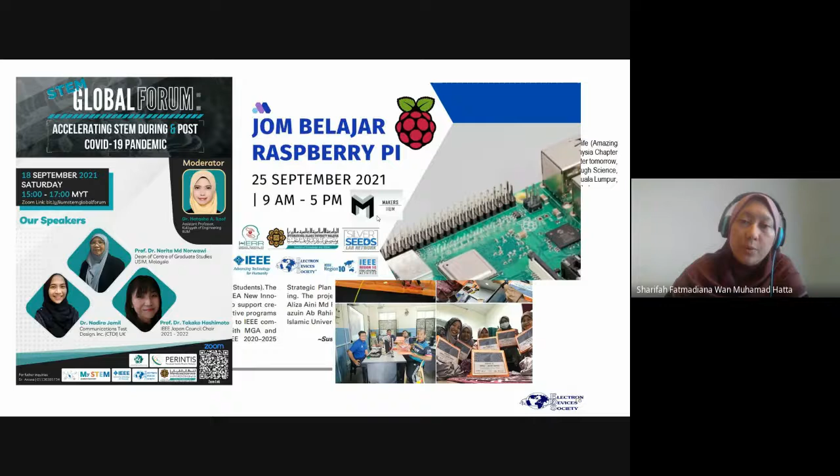So these are pictures again taken before COVID. We are quite recognized by other IEEE chapters. We were awarded the Outstanding Chapter in 2018 and 2017, and these are some of our awards.

We also co-organized some conferences, only last 2 years back in 2020 and 2021 we did a virtual conference. Hopefully in 2022 we can do a hybrid conference in Langkawi, that's ICSE. So I hope everyone can send some of your current work to our upcoming conference.

We also acknowledge women in engineering. This was done in March earlier this year, we did a forum to talk about women in engineering.

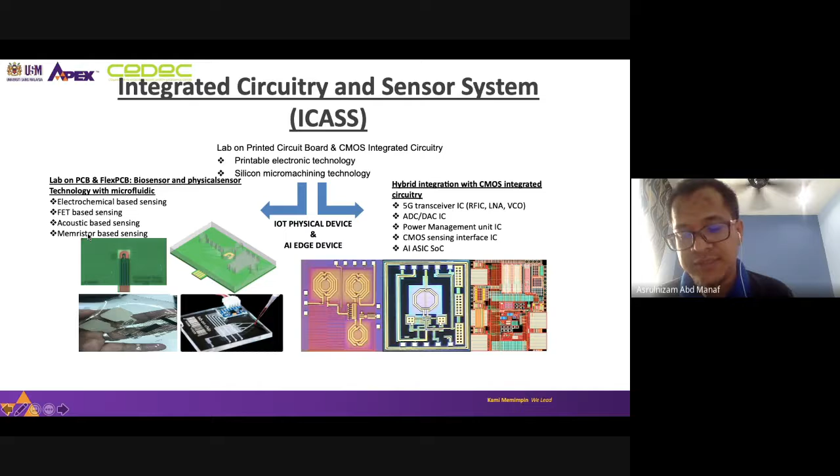So this is what I want to touch today: printable, stretchable electronic devices, specifically for medical applications. This is the outline for today.

I will explain the motivation for how we focus on the lab on printed circuit board. Some term it lab on flexible printed circuit board, the FPCB - lab on flexible printed circuit board.

Today I just give some idea of how our group focuses on developing a few sensors - pH sensors using electrochemical sensing with printable electronics, how we develop the pH sensors, and also the strain sensors, with specific application for wound monitoring.

And then I will give you some idea of how we explore the substrate selection, how we do the selection criteria into the printing technique.

There are a lot of printing techniques available in current technology - we have inkjet-based, we have screen-printed based, and a lot of other types, but they have criteria that you have to match with your application and your ink condition.

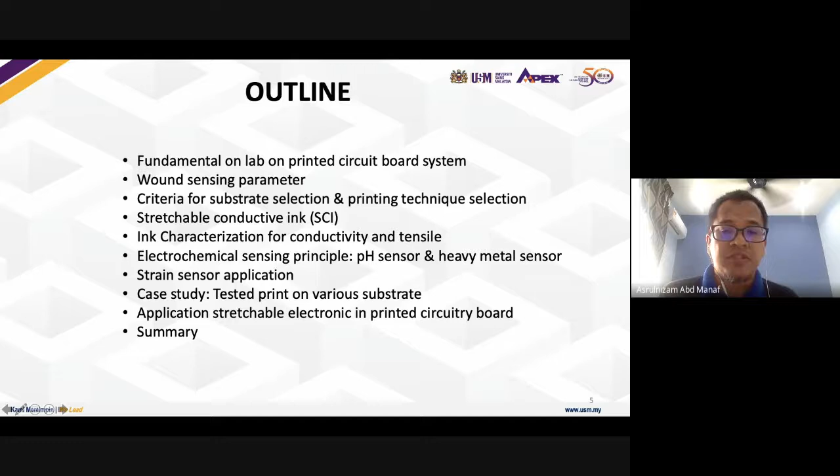Okay, I think Prof. Nohayati and all of you are already familiar with what they call the lab on chip - meaning how they work towards diagnosis, towards simplifying the diagnosis system.

In 1980, when MEMS technology - the microelectromechanical systems technology - was explored, a lot of sensors came out, like small pressure sensors and micro valves. This type of advancement in semiconductor fabrication led to the lab on chip.

That means they have technologies to miniaturize the functions of the lab onto one substrate. But in our group, because we try to make it affordable technology, I mean what is the simple technology?

Because if you rely on lab on chip, you need a lot of complex fabrication tools, such as sputtering, evaporation, and of course you have to have good lithography - that's based on miniaturization, for pattern fabrication.

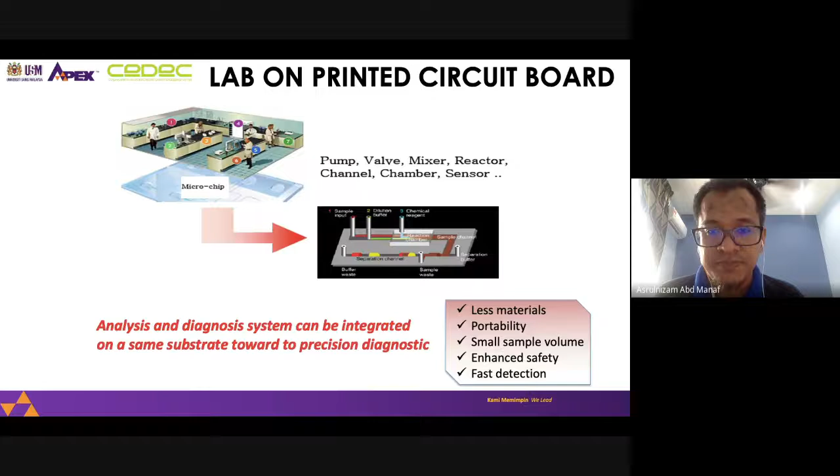Towards that technology, what we focus on in my group recently is the smart bandage. How can we develop a smart bandage system? So what is the problem with the current smart bandage? The current wound management.

When you have an injury or a wound, for example diabetes patients after surgery, they have a wound. The doctor has to monitor the wound condition, clean the wound, and so on. But with the current bandage, when it's attached on your wound, the doctor cannot get...

objective data in real time. So normally the doctor will advise you to come back next week to the hospital, and they will open it up to see if they need to do cleaning again, some antibiotic treatment, and then paste a new bandage again. Based on literature review, the doctor will replace a new bandage.

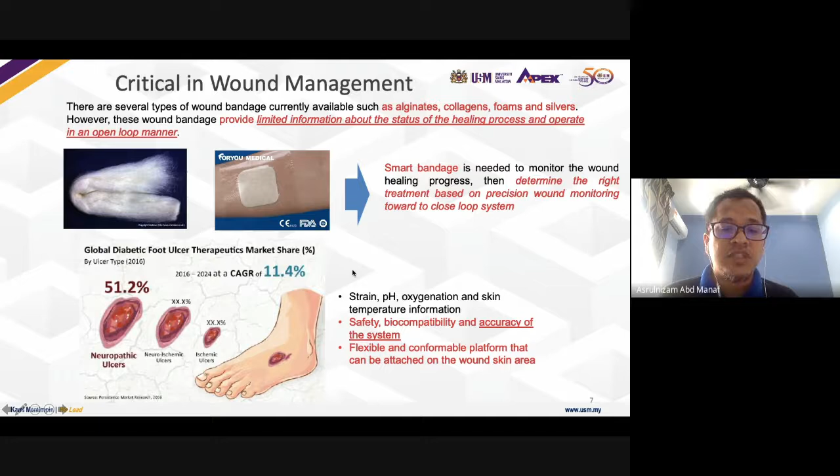We did some literature review in our group and found a good paper from the Matthew S. Brown group, published in Frontiers in Bioengineering and Biotechnology. From that paper we found a few parameters to consider for wound condition: the pH at the wound area, the oxygen level at the wound, the temperature, and also a strain analysis of the tissue.

From that data, it may be possible using printable technology to develop pH sensors so we can know the condition of the wound. This is a normal scale, the pH range from their study.

If the wound pH is more alkaline, it's easier for bacteria to grow, so we need to reduce it back to a healthy pH by giving the proper amount or dose of antibiotic. From that paper, some systems can give the right amount of antibiotic, meaning the treatment works toward what we call precision medicine.

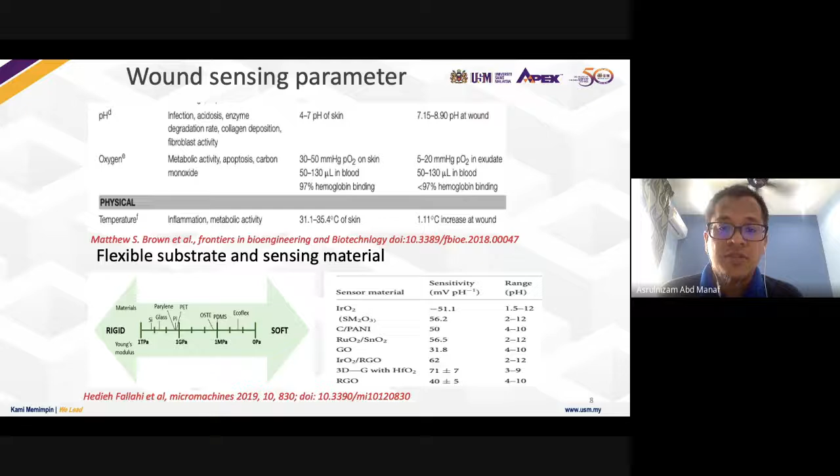From that, now we come to how to do the selection of materials, meaning the substrate itself.

We try to make it okay, hopefully one day attached to the skin, and how to make it avoid inconvenience to the patients.

So we went through a paper from Rogers et al., who we consider the founder of the Printable Electronics group. They did a good study in terms of conformal conditions - there's some substrate thickness involved. If you see these diagrams, you can find the details in that paper, published in Science in 2011. That's about the thickness.

If your substrate thickness is 500 micrometers, you can see they still have a gap. The analogy is that 500 micrometers is similar to our silicon wafer thickness - the current silicon wafer thickness is about 400 to 700 micrometers, that's roughly the thickness of a wafer, meaning compared to the skin.

In the image of the skin structures, you can see it still has a gap - it's not really achieving good attachment on the skin. So this group studied 100 micrometers, and you can see improvement, but still have a gap. They cannot follow the conformal structure of the body skin. Then they went to 36 micrometers, and they showed improvement, but after reducing to 5 micrometer thickness, they achieved very good conformal contact on the skin structures.

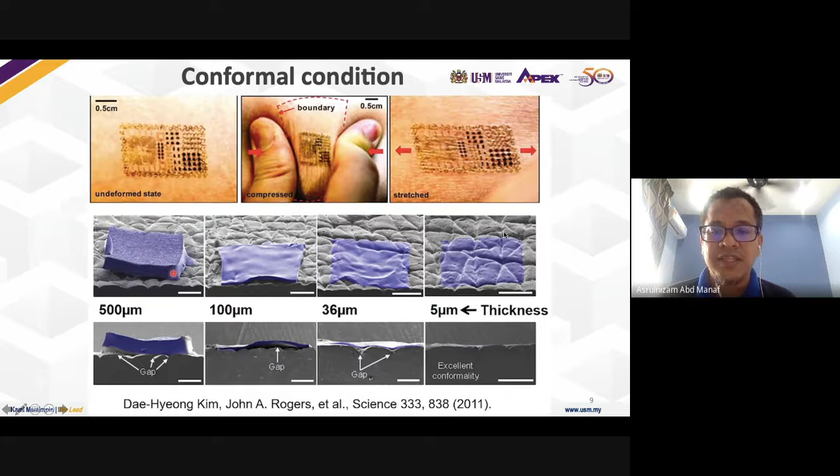What's the other issue studied by Prof. Someya, from the Someya group at Tokyo University? They are considered good founders and researchers in printable electronics. They used silicon rubber, and parylene at 1 micrometer. Their group has nanomesh conductors - this is a gold electrode, and they evaporate that electrode onto polyvinyl alcohol.

The polyvinyl alcohol is considered a water soluble material. So they printed the pattern of gold electrode on the PVA, and then used water so the PVA is removed. When the PVA is removed, the pattern can straight away be attached onto your skin.

What they studied there - with other techniques, there's an issue on the skin effect. This area is fully attached, meaning there's no air gap for the skin to breathe. That's what they mentioned in that paper.

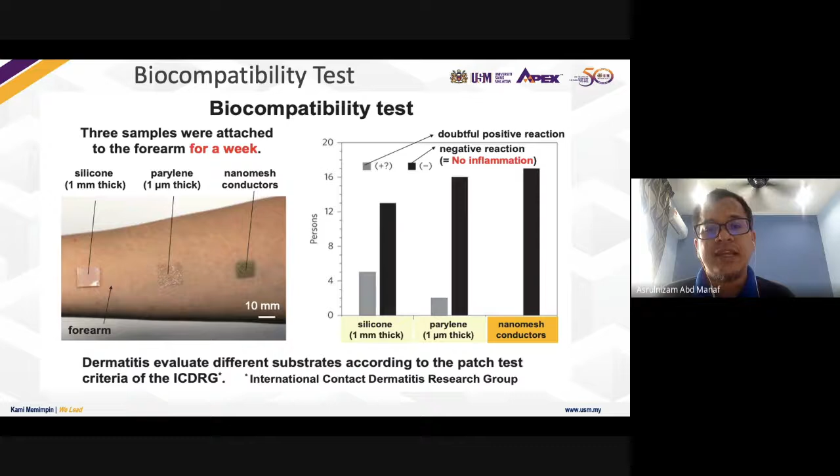By doing the design specification and sensing parameters, we also have to consider the substrate thickness, based on the application and how we can do the printing - to make our substrate flexible and stretchable.

This is a study done by very top research groups, from Illinois, Tokyo University, and Someya's group - evaluations of transistors and printable electronic stretchable devices. If you go through it, there are three types, three methods to make our substrate into flexible devices.

The first is called deterministic composite. This means we have the substrate, and on top of the substrate we deposit a thin film, but we make the thin film geometrical - like if you're familiar with the Japanese concept of origami paper, they have a pattern like origami, geometrical. That's why when you apply stress, it behaves like origami under stress. That can be the concept, but you need the fabrication tools.

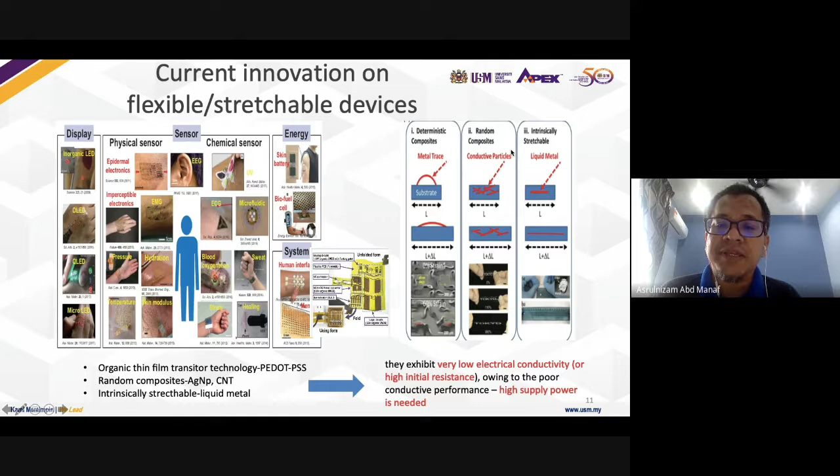For the random composite, we need a few printing techniques available. That means we have the inkjet printing technique and the E-jet, dispense, like the concept of 3D printing. Each printer has a different type of ink characteristic - the most important is the ink viscosity.

If you use inkjet, the viscosity is too light compared to screen printing. Screen printing needs something like a paste - the ink is like a conductive paste.

You have to match with your type of printer, and then match with the properties of your ink. That's why if you purchase ink from overseas, you have to ensure the properties match your type of inkjet. There's a viscosity you have to consider - basically it cannot be a paste, otherwise the nozzle cannot operate properly. If you use screen printing, the ink must be in paste conditions.

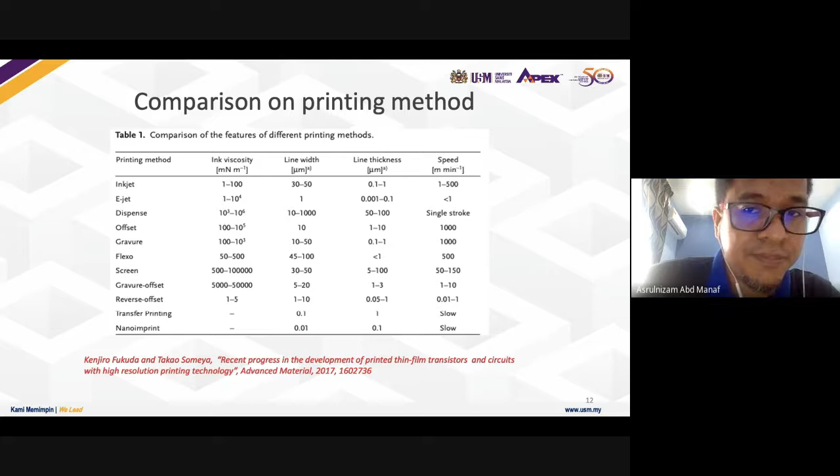If your ink's cure temperature is too slow, that can reduce the pattern resolution. So how we match the printing - the printing type must be matched with the type of ink.

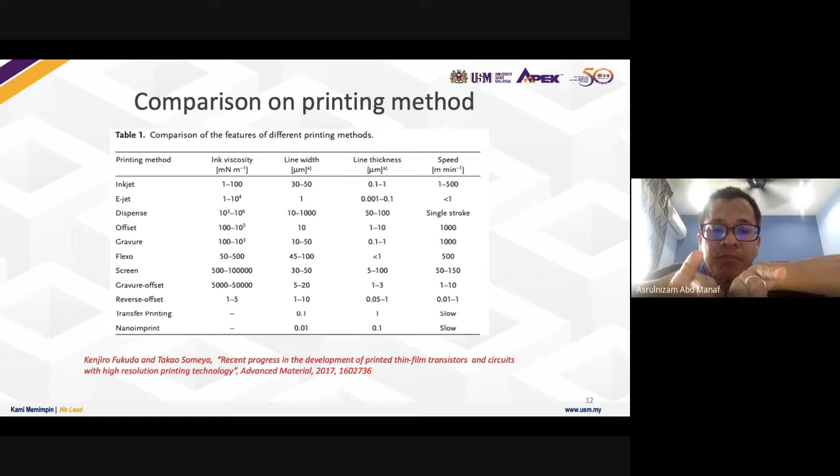So how we choose the ink criteria: ink viscosity, the line width, line thickness, and also uniformity. Normally when the ink comes out, it will start to cure from the center to the edge, so there's some non-uniformity between the center and the edge.

That's why for inkjet printing, the thickness is about 0.1 to 1 micrometer, but screen printing gives a much thicker layer. So based on your application, you have to choose the right printing method.

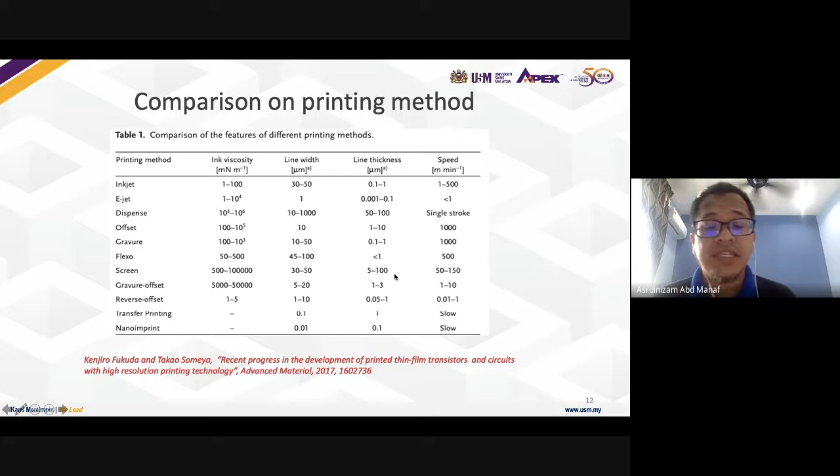So this good review was done by Takao Someya. They did a review specifically on TFT, thin film transistors. So in our group, that's what we are focused on.

The concept is, when they detect the temperature is highest, the heater will heat up, creating a localized temperature. We use flexible wires connected to the MCU, the microcontroller, to do the processing.

This means when they detect conditions where the wound is bad or alkaline, there needs to be a storage amount of antibiotic that can be delivered locally to the wound condition, so that the wound can heal faster.

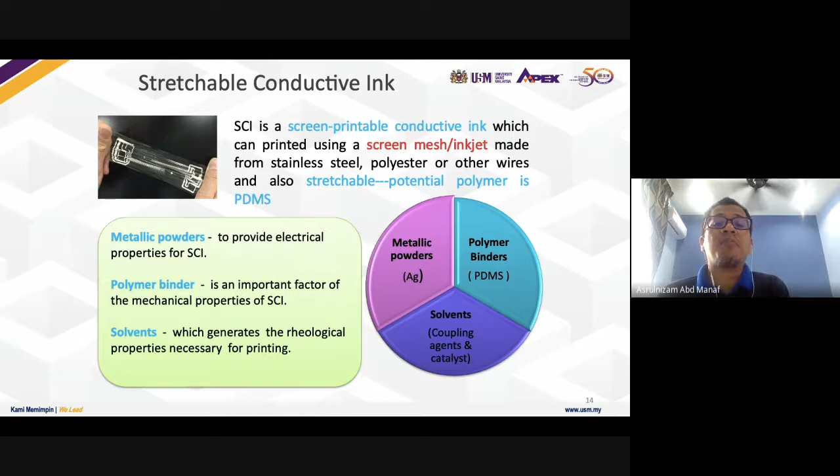So from that, at that time we did some studies using PDMS, a polymer, because my group was familiar with PDMS from our microfluidic work, which we bought from a company. But it's a polymer, meaning it's an insulator, not conductive.

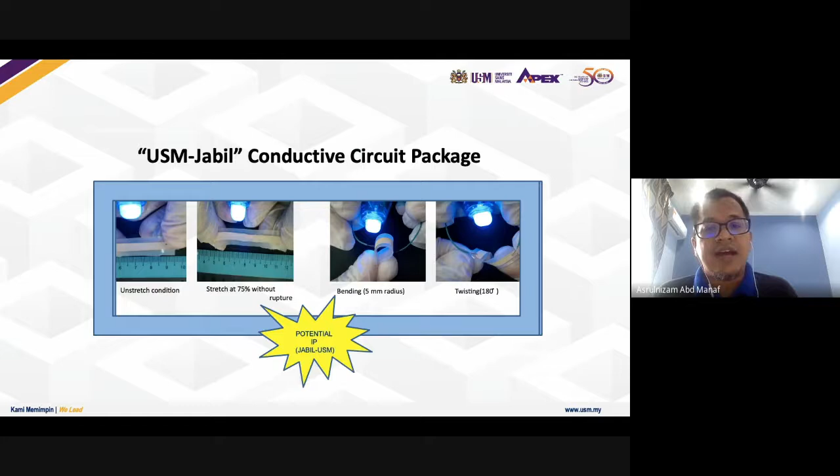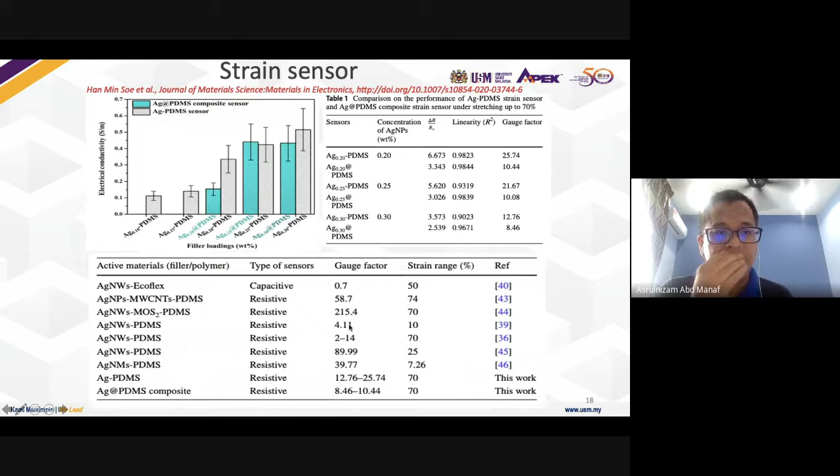The other work, which we did with Prof Marati's group, was on strain sensors - how to make it sensitive, how to make a very sensitive strain sensor. We used PDMS again, mixed and played around with the ratio of silver nanoparticles. This was one of our PhD students' work, in collaboration with the School of Materials. She already graduated this year and went back to Myanmar.

By having these factors, we achieved good gauge factors, and the strain range could go up to 70%. But the latest stretchability - last week we had a keynote talk from Prof Malaya showing 1000% stretchability. That's very good; we only achieved 70%. You need to play around with the material properties.

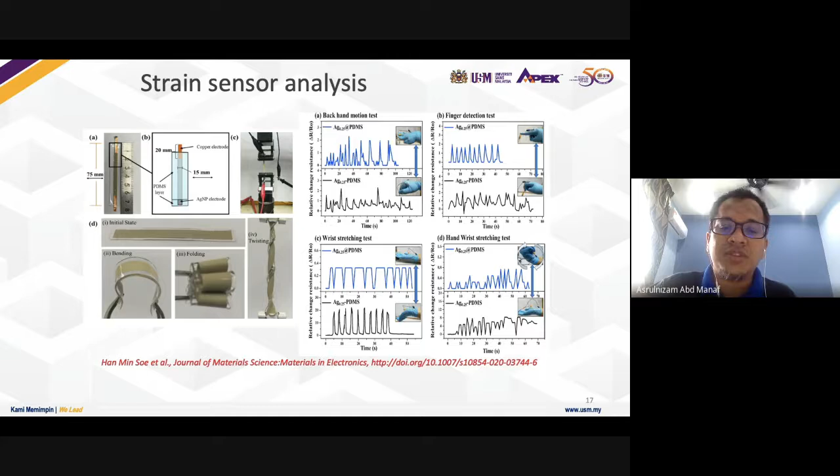This is what we tested. We did some twisting analysis to see the robustness of the ink, and we also did hysteresis studies. Then there are studies where we put it on our finger to see how sensitive it is, to detect finger motion.

And then the others - we also did fabrications and techniques towards a smart bandage. We bought that bandage from a pharmacist and printed it with CNT ink. That was our first test, testing the conductivity, and we also tested it just playing around, including on gelatin, to see the adhesion between the ink and the substrate.

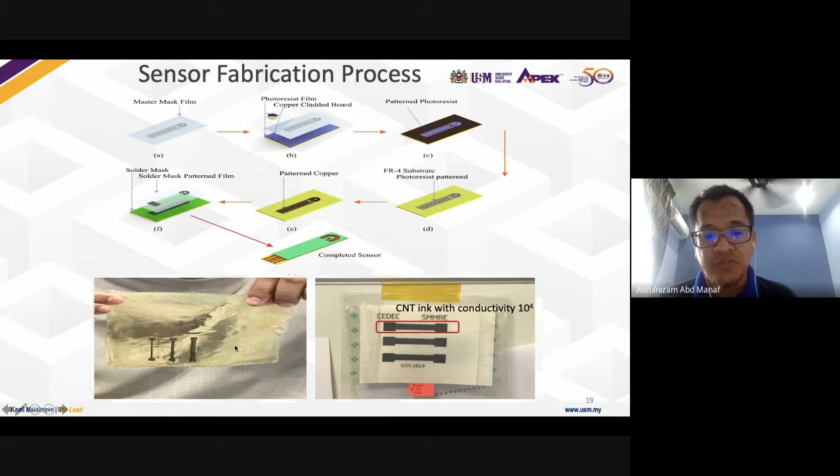We also developed pH sensors and published in Sensors and Materials, but we still suffer in terms of sensitivity. This is still ongoing work on the ink formulations.

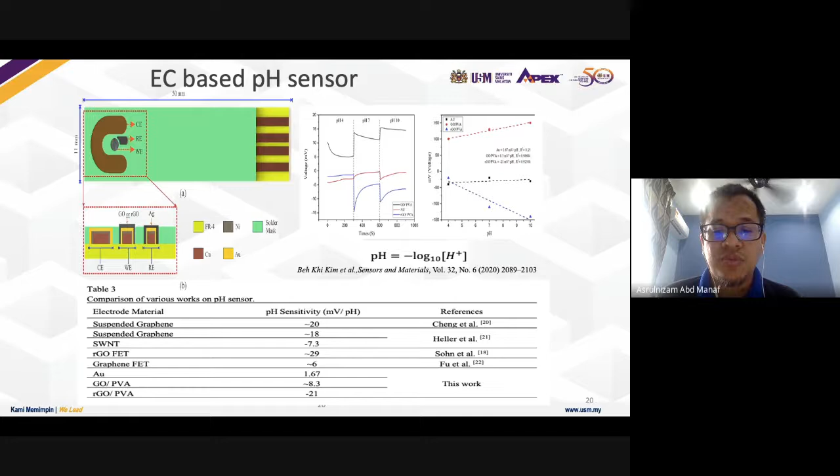The others in our group are also trying to make water-based ink for a biocompatible process. We also have carbon black - we do printing with carbon black, making sensors from the ink. That's a printable technology, and we printed it in our laboratories.

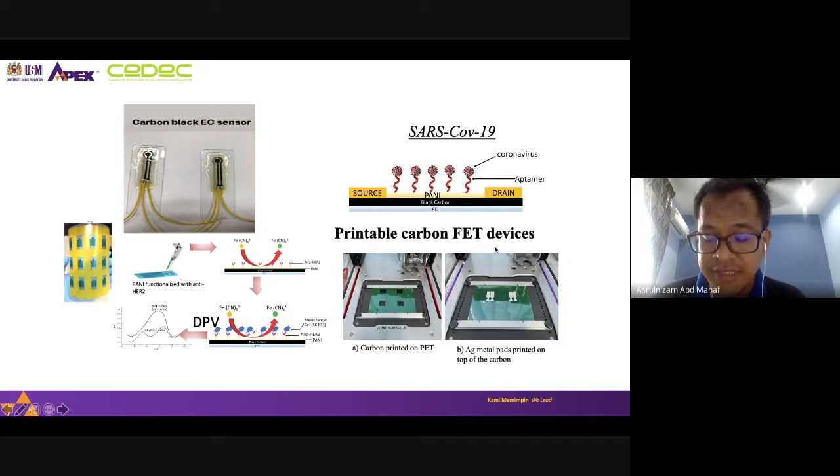So we have our own custom-made printed electrochemical sensors. We prove the formulations - gold, and then next we do the RGO. But we've done a first test on the PCB that we're going to replace as a PET substrate, that means to do the salmonella detection using the electrochemical sensor.

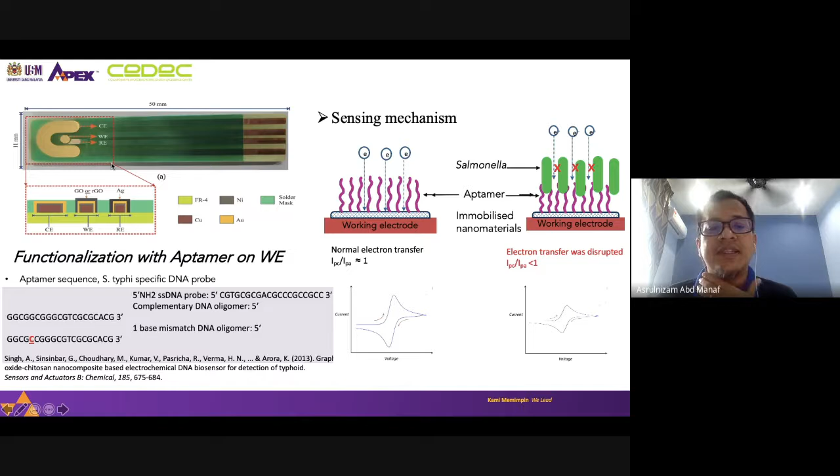So that we designed, that is our own design for EC sensors. We also do testing on the others' work, because in our group we also do testing on heavy metals using the PCB, the printed circuit board, so that we can take some data on the heavy metal detection, and then we reached the LOD of up to 32 parts per billion.

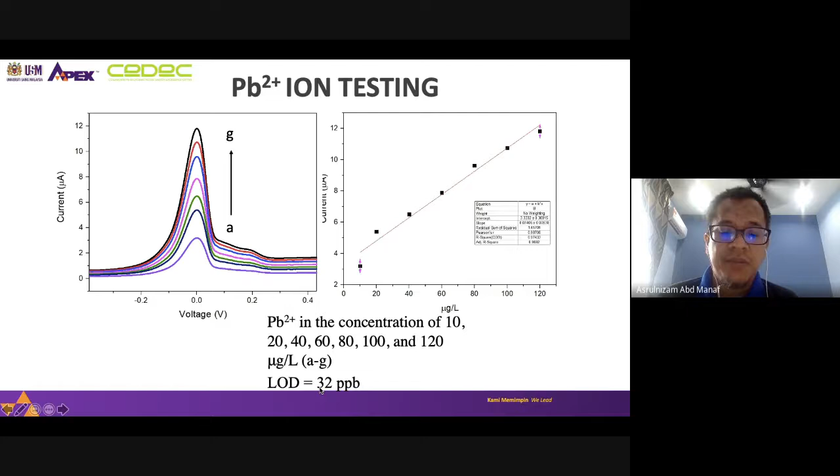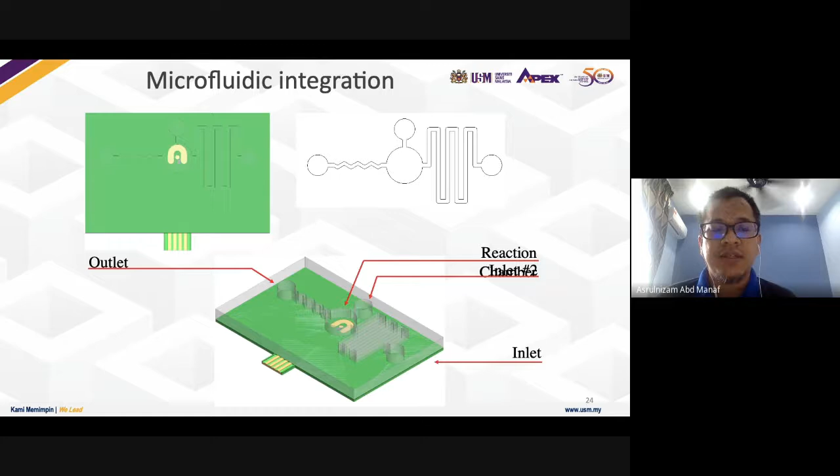So this is some integration with microfluidics, now still ongoing with my PhD students, that we try to make it flexible, the stretchable, so that's on the microfluidic integrations. So this is our lab, so that's one of the examples.

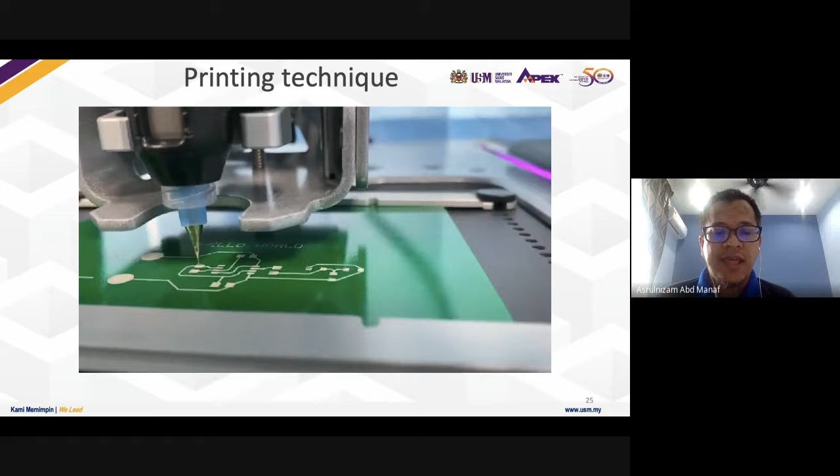So that is the screen printing base, that we bought from Voltera, and then we also do a few tests on multiple substrates, so like I gave, and then that is our board factory.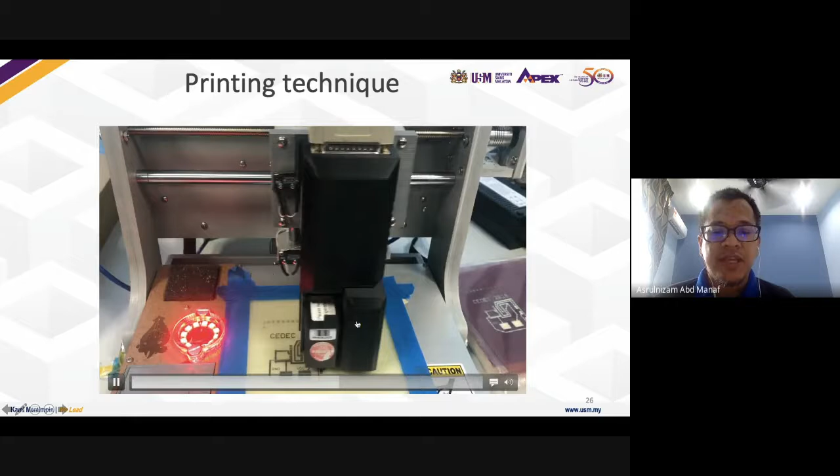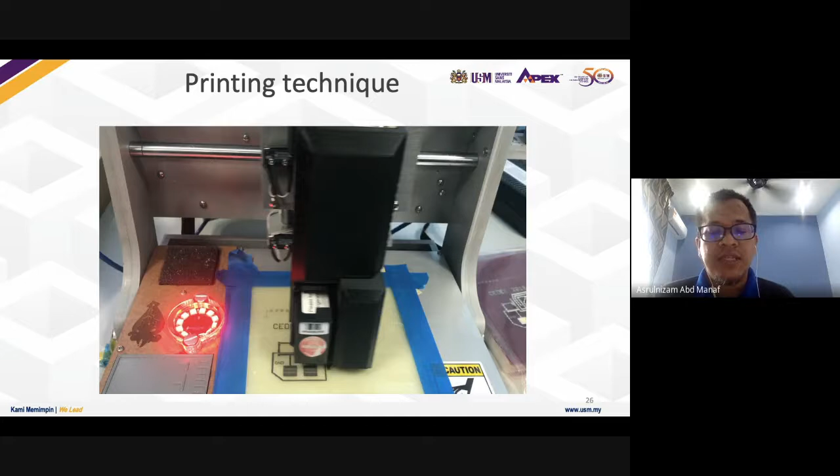So that is for the inkjet base. So the inkjet base, that is that we printed on the TPU. This is a TPU substrate. So we attach the TPU on our rigid substrate. So after we do the fabrication, then we peel off that TPU from the platform, that means from the rigid platform.

And then the other work, we also have studied the possibility to develop a circuit trace for a printed circuit board. So this is a normal Gerber file. If you do the design on the printed circuit board, the rigid FR4, and then you can see here, if your design is on the PCB, that means that is normal.

That means they have the sharp edge corner, that can be the sharp edge corner. But when you apply on the stretchable, your substrate will be stretched, so they have the possibility this substrate will break, right?

So from that, we did some work with the school of mechanical, and then they do some stress analysis. So from the stress analysis, we can see, so with a sharp edge, there's more stress, which makes it easier to break. That's why we're working on ongoing standard fabrication, like if you design an IC, we have the PDK file, the process design kit file. So the same - if we apply on the stretchable, we need to study how the curving works, right?

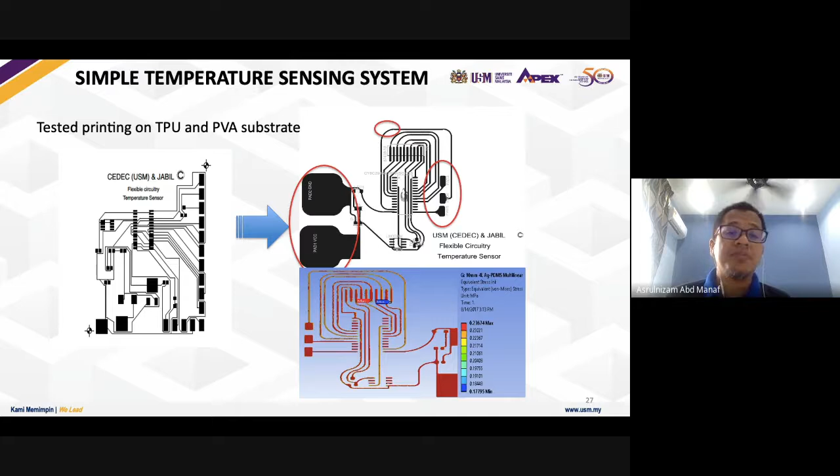So that is what we design - the conventional PCB Gerber file, but we need to have a curving, also the same for the pad. And the pad also, we cannot have like the sharp edge corner. That's why we have a design where we have the pad also there, so like this, they have the curve. So that we do some study on what we call the PDK file, the process design kit technology for the stretchable design, for the circuit design.

So this is our test, we can see here. So this is the PDMS, that is the silver ink. So that we have the LED turn on, and we can see that the power is supplied. So this is the microcontroller, the MCU, to control the temperature monitoring. So we can see here, when I attach with the finger here, then we can see the changes of the temperatures.

So this is what we prove - the surface mounted, the SMT, with a small component, with a larger component, and then with a medium size of the component, to prove for the stretchable flex, the stretchable printed circuit board, right?

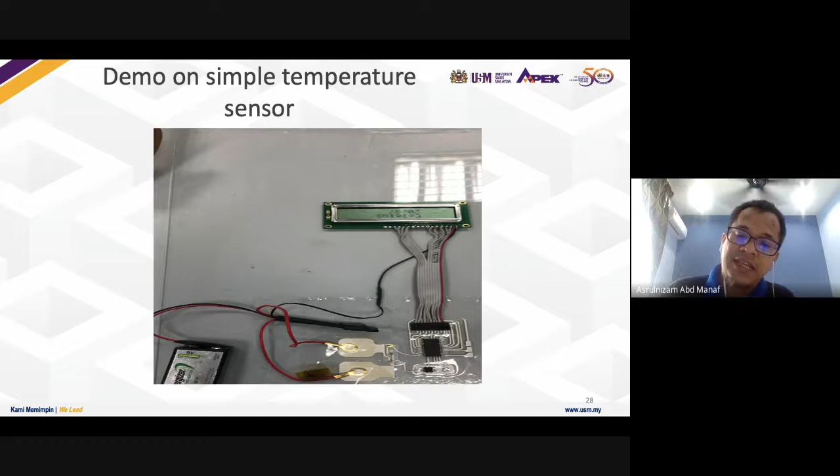So if you have a rigid paste, like we have a needle, that means we have a pin, the foot pin of your MCU. So we use stress, so the paste also will open up. That means your component will be peel off, right? That's a few we go through.

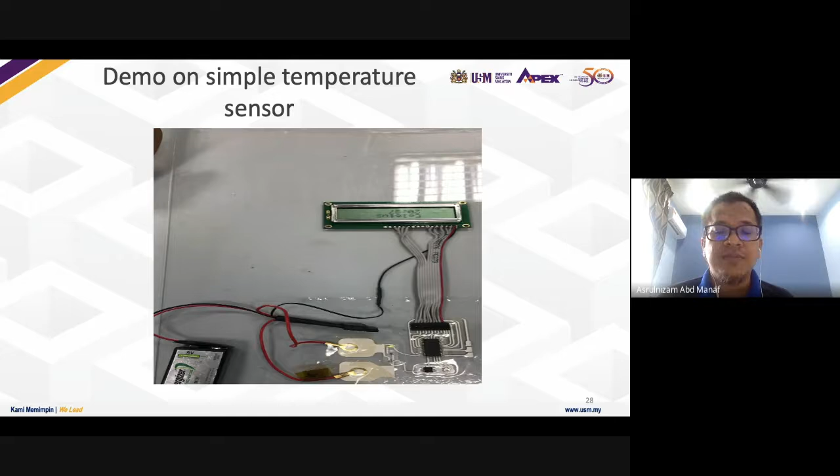So the challenge - this is what we did for the stretchable, the flexible circuitry on the temperature sensors.

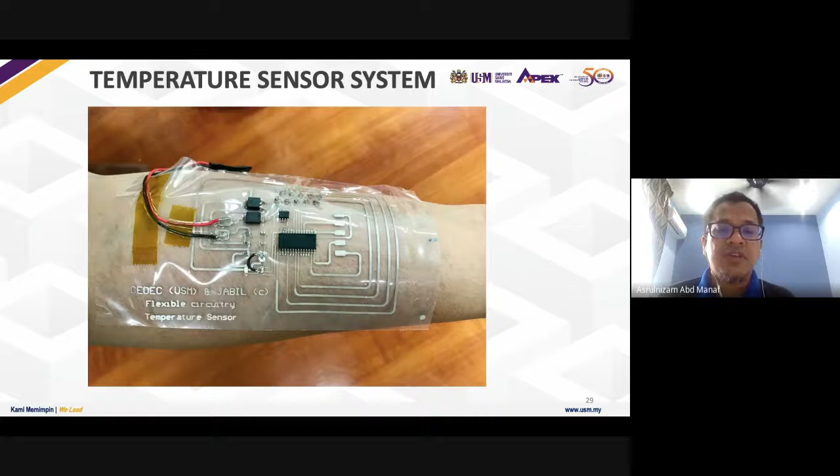So this is what I will do, some printing. So that is on the PVA. This is on the polyimide. So that is on our bandage. This is on the gelatin. So the bandage we bought from the pharmacy, made it pure transparent.

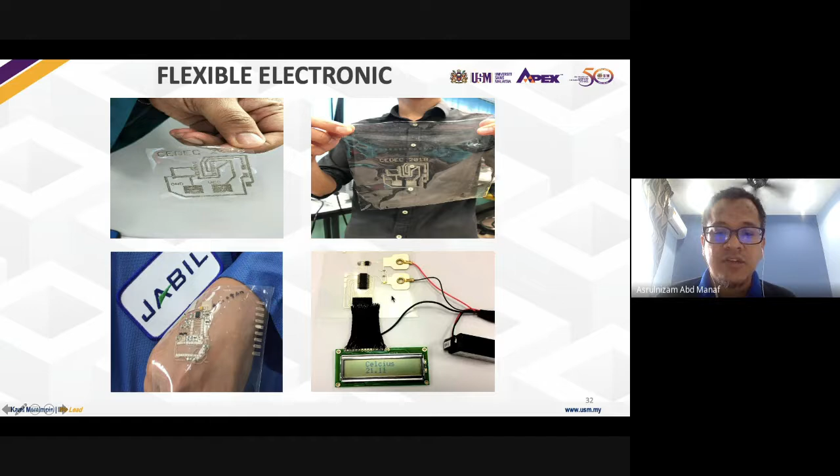But we still suffer to have a good, very thin film of the substrate. So that is the PVA, so that's the TPU, the thermoplastic polyurethane.

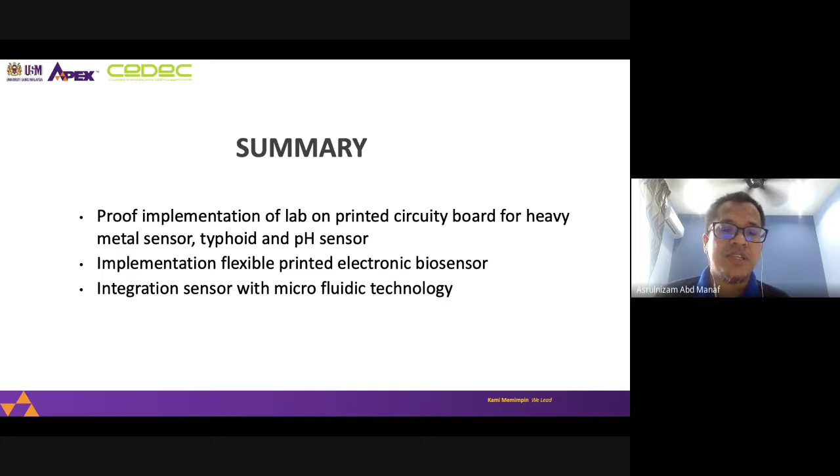As a summary, we've done some implementations of the printed technologies to develop the pH sensors and also the strain sensors, and then we tested with the stretchable conductive ink, and also did some proof study on the development, the process design kit for the printed stretchable printed circuit board. That means for the surface mounted SMT.

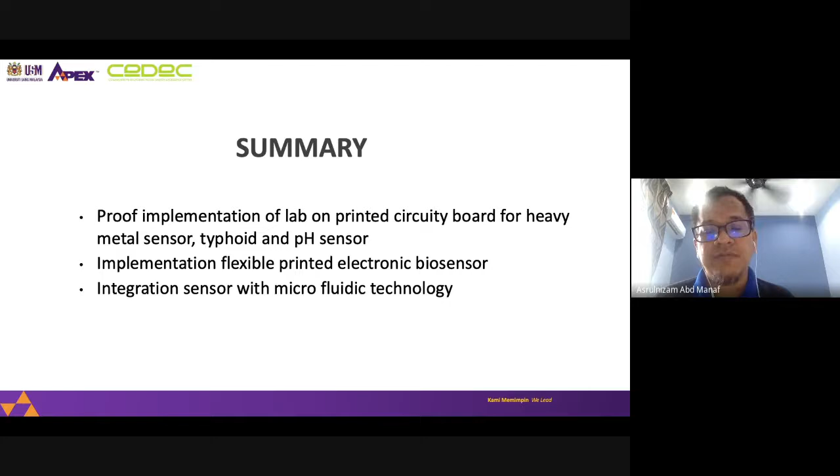Next we are going to have the microfluidics technologies on top of the sensors to work toward medical applications. So this is the announcement from my group - from our collaborators and also from our group, and all the student staff and also some application for this work. Thank you.

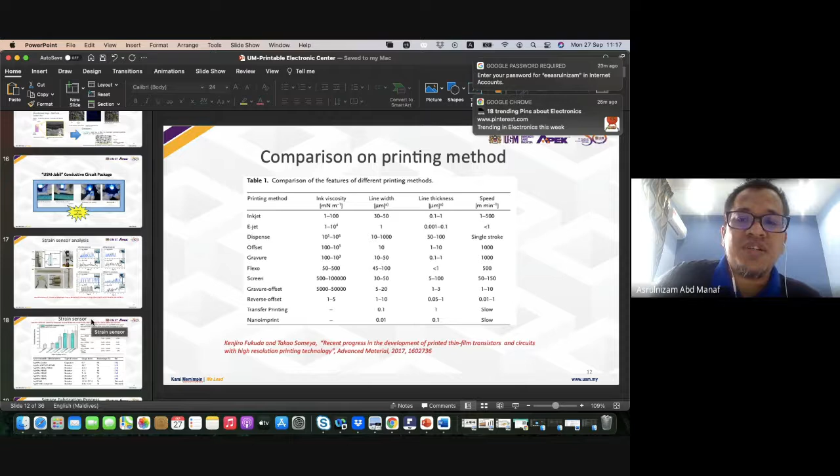That's why in my lab we also open the services. If anyone wants to do printing, we offer for silver. But for carbon, like in our business, we have a carbon ink, we have the stretchable conductive ink. We don't offer that as a service, that's only in research mode. But the silver is already established.

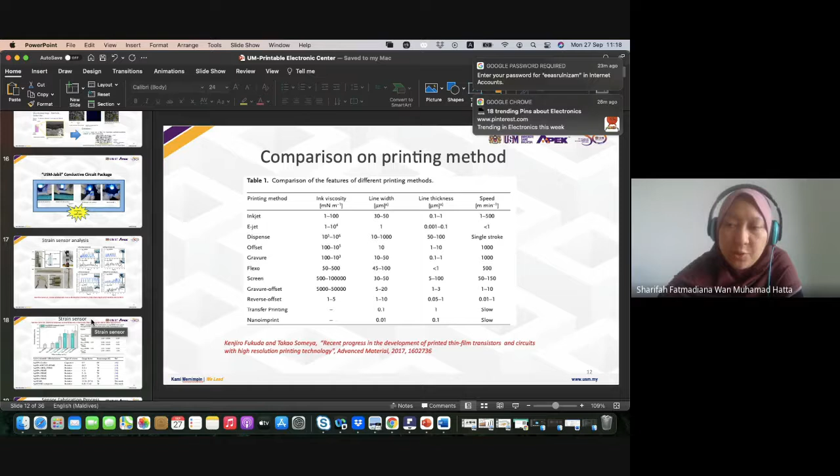And then for your smart bandage, you directly printed on the cotton bandage, is that right? Yeah. So any specific issues you face when printing on textile?

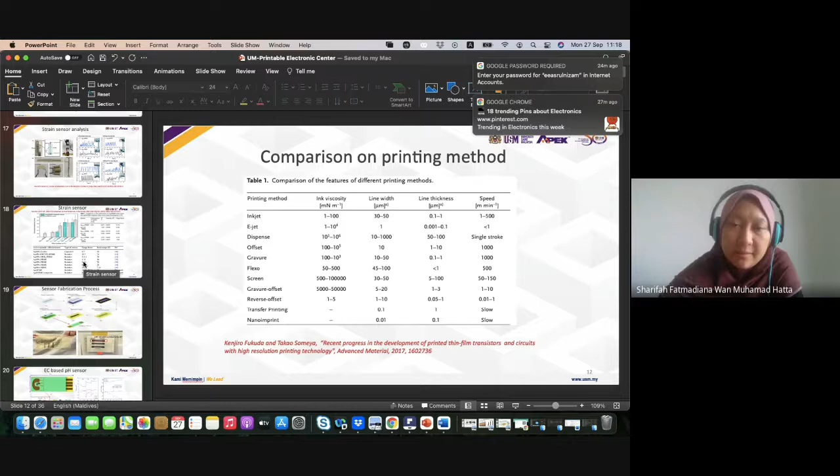Of course, the first is about the connectivity. The connectivity, because when you have cotton, that's why when we do the printing we cannot. The good thing is with a single layer you should have the connectivity, no, we need multiple layers.

With one layer, one layer still has issues and is not conductive. That's why in some cases we do about 20 layers, to do the printing so that it can be more connected, otherwise it filters. That's why, if the single layer could be enough conductive, that would be good, because you can lower down your cost and simplify the process. But in our experience, we need multiple layers to have good conductivity.

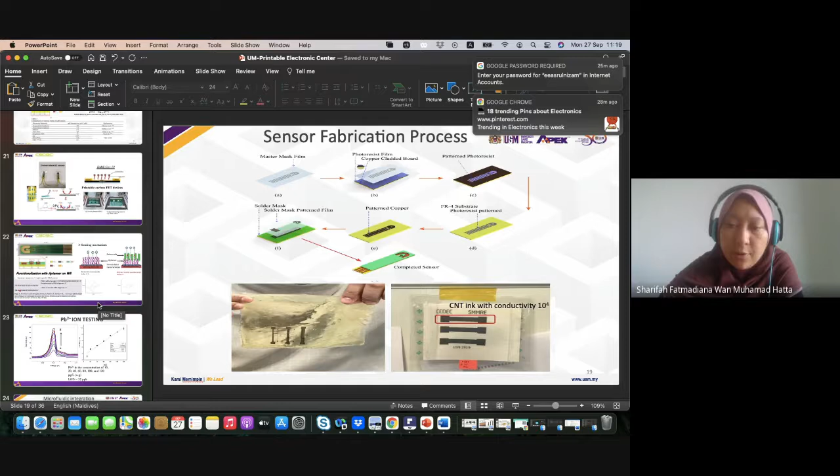Okay, from Miss Azwa. Thank you doctor for your talk. You mentioned earlier that ink formulation for inkjet printer is difficult compared to screen printer. Can you share a bit what are the challenges?

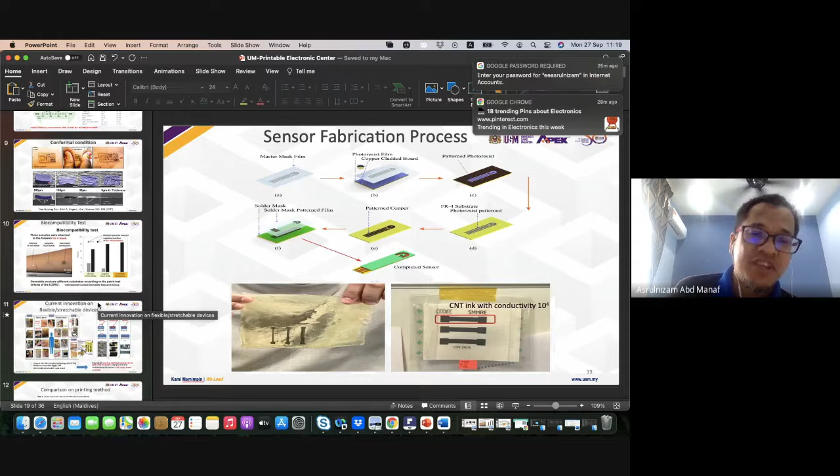So that's just from my experience, what we're facing as problems. Let me see. So for the inkjet based printer, of course the really critical thing is the viscosity.

You cannot do a paste, right, and then they have nozzles. The problem is, if you just want to print silver, fine, there should be no problem. But if you want to tailor-make your ink to be a polymer that must be conductive, you have to add particles, the silver flake. Because of that we have to tailor-make in terms of the nozzles, because they can clog the nozzle. That's the first thing we're facing.

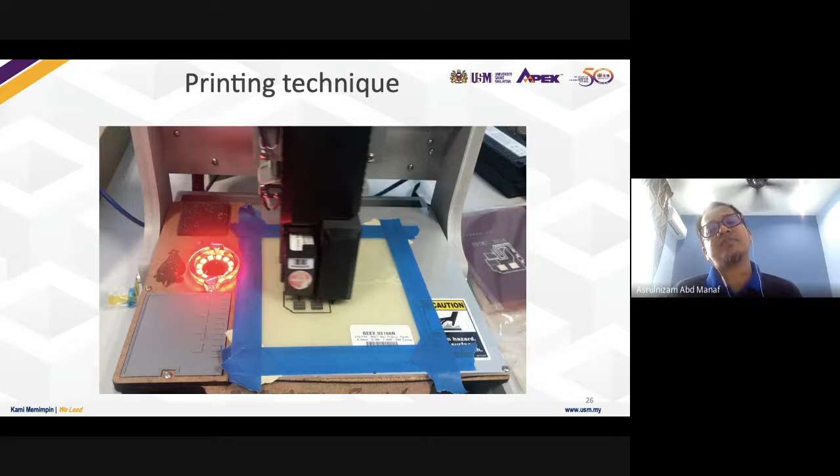Okay, thank you Dr. Asrul. If CPE has any problems, I hope you can ask for help, you have very extensive experience in this.

Okay, last question. If you have someone asking whether you have a position for postdoc.

Actually, we just ended the postdoc application. The deadline already finished, and the new postdoc will come in October. So right now we don't have any vacancy for a postdoc. It's already fulfilled with 2 postdocs in my group.

I see. If you do have a position, do you do advertising? How do you advertise it? Maybe some people want to know.

Actually, we do advertise on our Facebook, for CDEC or our center's Facebook, and also our website, for the call for postdoc. The last submission is in June, and then the result is done by September, and the new postdoc starts to register in October.

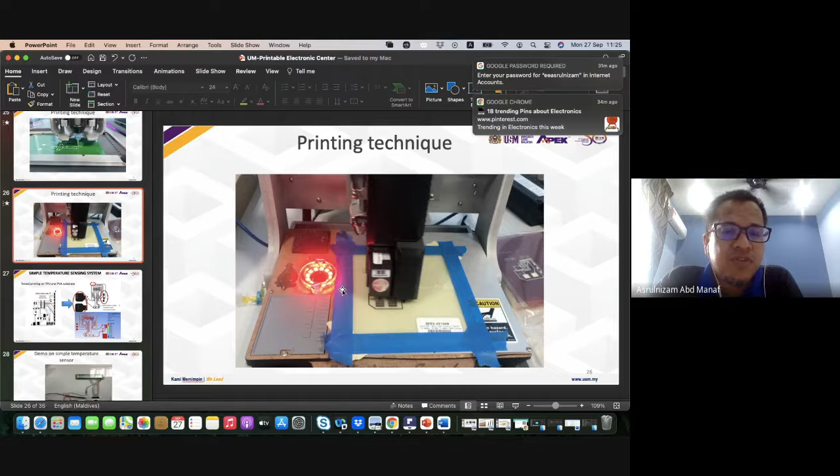So if people are interested to join Dr. Asrul, please look at the FB, the social media. Our social media for my center, and also on our website. Okay, so I'll stop the program now.

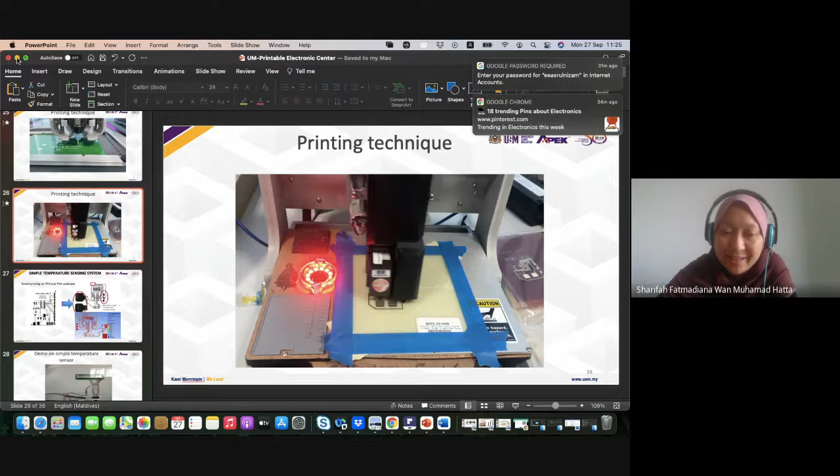There's another question, sorry. One more question, last one. Maximum which concentration can be used in case of RGO?

So the problem is with the RGO. We are still studying - they need, like, to reduce GO, and from our partner, that means the collaborator, they need some of the toxicity data. That's why some study using ascorbic acid or something like that, that can make the water soluble RGO for ink.

So do you mean the concentration of RGO, or the viscosity of the RGO, or the concentration of the RGO that we use in our sensors? I believe so. Okay, thank you, Ahmad.